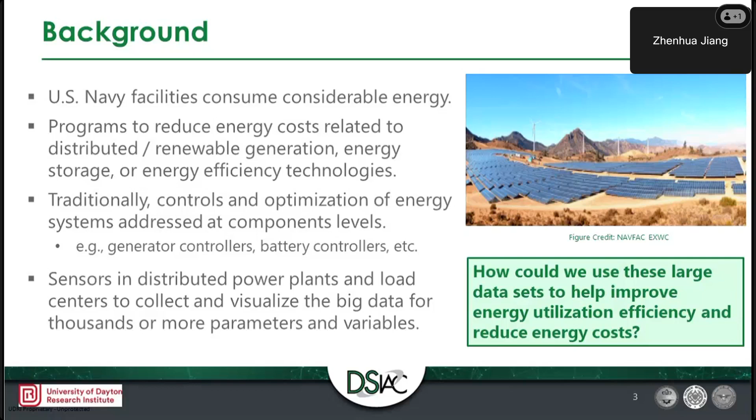In the past, some solutions such as microgrids could provide improved resiliencies, but the challenges are still existing, and some new capabilities are needed. For example, we may want to have some system-wide energy optimization across the large-scale power grid, or we also want to have some real-time look-forward prediction capabilities to understand the system behavior, such as the renewable energy availability, load profiles or priority, energy costs, or even electricity prices.

In the case of parallel operation, multiple generators can operate at full or partial capacities, which can result in some varying fuel efficiencies. Also, these generators may need to adapt to different control scenarios, for example, the voltage regulation or active power regulation. We can use some load shedding strategies, but it might be based on some dynamic priority level, which depends on the scenarios or operating conditions. So some additional data analytics or learning algorithm might be desirable.

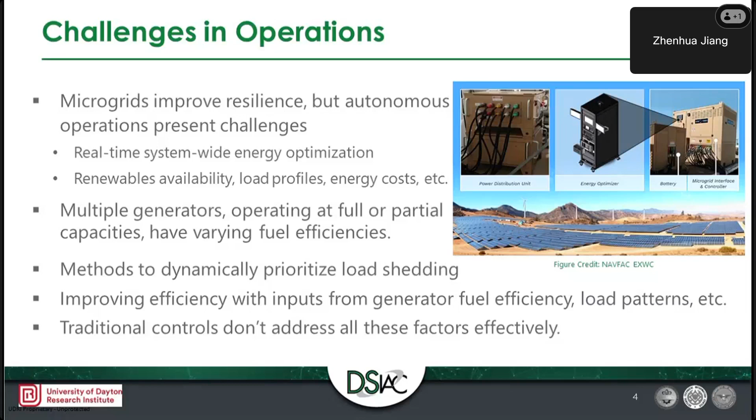So with all of this said, situational awareness about the system operations, such as generation and load, might be essential to achieve more efficient utilization of all grid assets. However, traditional control systems may not address all of these factors effectively, particularly in real-time operation. So to address all of these challenges, it's very important to understand options and the impact of potential energy-saving technologies, and even automate the energy-saving processes.

Specifically, to answer the data analytic questions raised earlier, the UDRI team proposed a machine learning and predictive analytics solution in a contract with the Navy. This solution combines the benefits of the data-driven Bayesian neural network with a physics-guided learning framework. And this solution can also enhance the predictive capabilities to optimize the control for microgrid operation. And the objectives are to improve the energy forecasting accuracy, reduce energy costs across the Navy shore establishment, and also reduce the redundant equipment if possible.

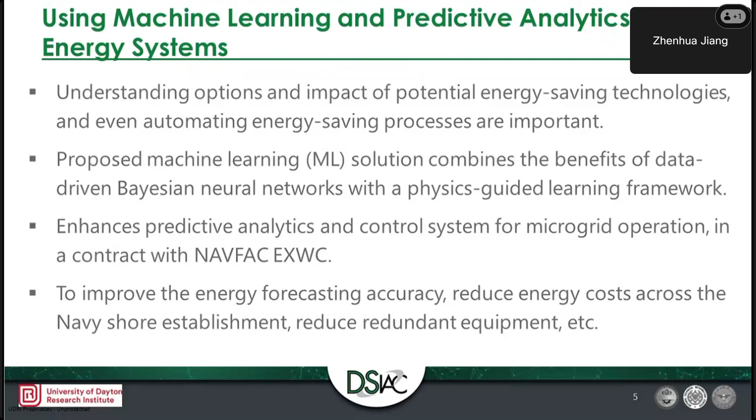So now let's take a look at some innovative features of the machine learning analytics solution we are developing. In the past, modeling and simulation of dynamic systems have been an important tool for control system analysis, design, and testing. Traditional physics-based models provide very high fidelity dynamics for the control design, but it's still facing challenges. There might be some unknown system dynamics at the time of design, and also the system or model parameters may change with the system operating conditions.

So on the other side, some data-driven machine learning methods may analyze the data and extract some useful insight. These analytics might be available because we can take advantage of the operating data available from sensors and some machine learning algorithms and computing resources. But on the other side, the machine learning approach typically generates some point-to-point predictions, but the uncertainty in the causal relationship may not be fully captured.

What is good is that some probabilistic-based Bayesian learning may be able to concisely capture uncertainty based on the probability. So the Bayesian inference typically assumes some prior knowledge based on the prior probability distribution and can derive the posterior distribution or some new knowledge from the collected datasets. This dataset can be considered as the new evidence or observations. And the Bayesian inference process can update the belief or the behavior of the prediction.

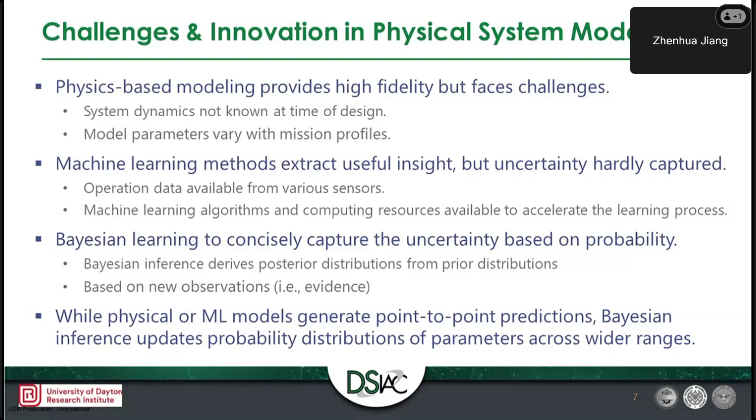So here, this shows a diagram of our approach, where many people talk about cyber-physical systems or digital twins. Our methodology is a three-pronged approach. Here we consider the physical, digital, and probabilistic aspect. So this is a three-dimension, or we call it a triplet framework for system dynamics modeling and learning.

In the physical domain, sensors can collect data from physical systems, and the actuator can perform commands sent from the embedded controllers. Physical-based equations can be used to characterize the temporal dependency and the dynamics in the physical systems. In the digital domain, machine learning methods can capture the causal relationship and reflect the input-output relationship in the training datasets. High-performance computing systems such as GPUs, FPGAs, or supercomputers can help to accelerate model learning processes.

Uniquely, the third dimension in our approach is a probabilistic representation and analytics, which can quantify uncertainty and capture the stochastic behaviors and consequences. This is important and useful for what-if scenario analysis in contingency studies. It will provide opportunity to maintain some deep deliberations about the possibility that has not been happening yet and predict the potential consequence before adverse effects occur.

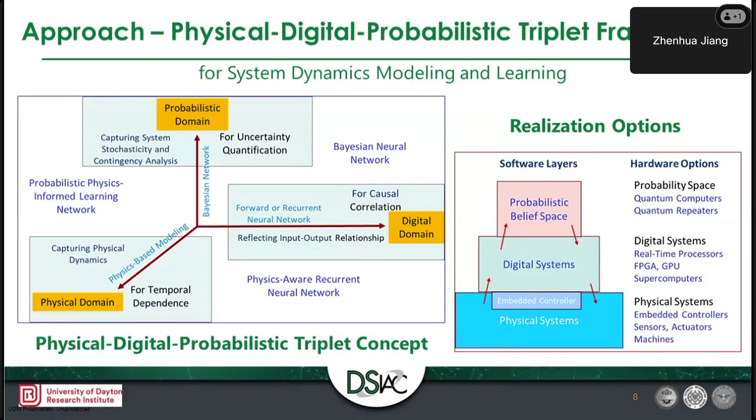So our machine learning analytics solution has three dimensions and leverages a modeling method suited to different domains, including the physical domain, digital domain, and the probabilistic domain. In this framework, the physical space models can represent the known knowledge we have that can be integrated into the design of a neural network.

The neural network learning capability can learn the patterns or features from the operational data and predict the potential behavior of the system. And the Bayesian inference can be used to capture the uncertainty and the probability distribution of the variables or factors in the model. And altogether, this can achieve more insight about the system operation.

So this diagram illustrates an example of the model integration or fusion process of data-driven physics-guided Bayesian neural learning. So before the design, we may need to determine the existing known equations about the system model and some parameters and constraints of the system. So this model integration process consists of 6 steps. First, we can formulate the physics-based equations and feed these to the design of the neural learnable model. And second, we can use the offline or online data sets to train the neural network models.

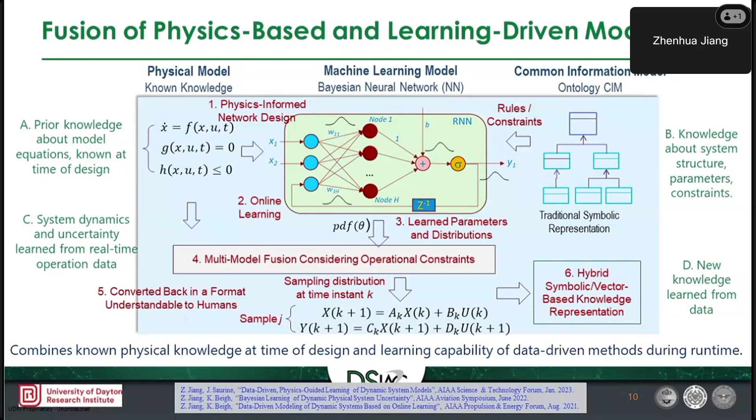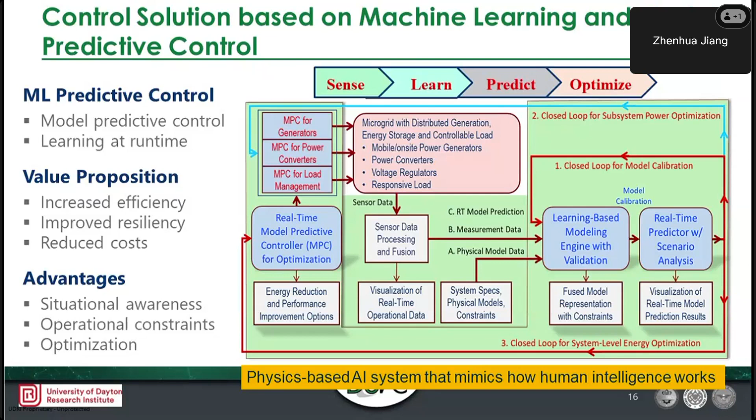We'll take the simple circuit as an example to show how we can design the two-layer MPC. First, we follow a general approach to formulate the model predictive control schemes. Typically, we need to know the models of the dynamic system. The models could be based on physical knowledge or equations, or even machine learning models. And we can consider some constraints on the control variables or even state variables.

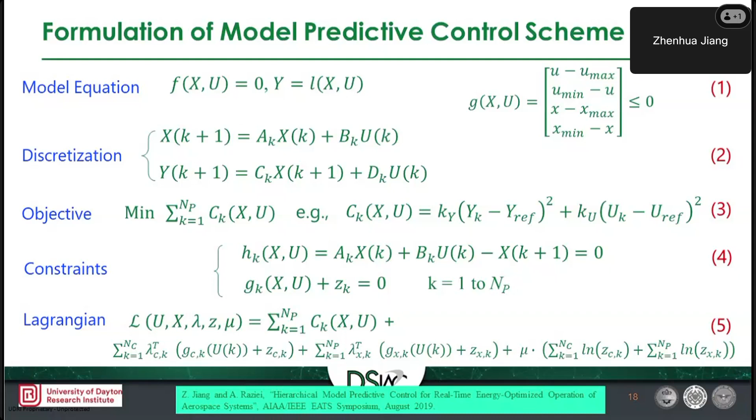The next step is to minimize the Lagrangian. In order to do that, we can define a decision variable vector theta here. The goal is to find the best decision vector theta so that the Lagrangian could be minimized. According to the first order optimality conditions, or KKT conditions, when the derivative of the Lagrangian with respect to the decision vector theta is 0, the Lagrangian will be minimized. So the goal then is to find the solution to this equation, and this is a nonlinear equation of theta.

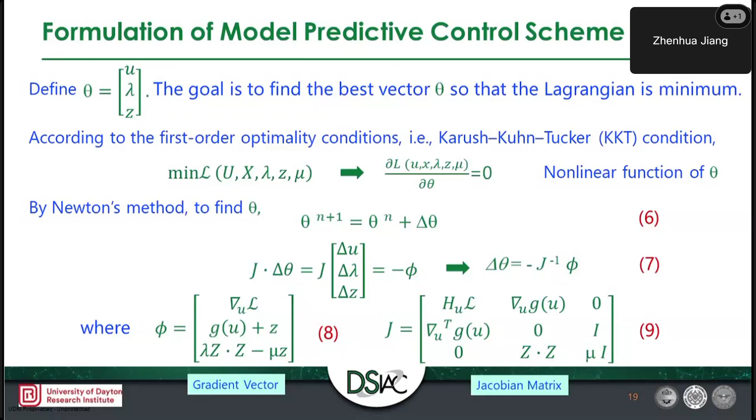By using Newton's approach, we can find the iterative solution of the decision vector theta according to the equations shown here. There are some calculations to find the Jacobian matrix or gradient vector to update the decision vectors. After some iterations, the decision vectors can be found. And this process will generate the optimal control loop for the control systems.

Next, I would like to take a very simple example to show how we can apply model predictive control to the hybrid systems. Here, there are two MPC controllers. The higher MPC is trying to optimize the energy flow across the entire system, and the lower MPC is trying to manage the dynamics of the power flow.

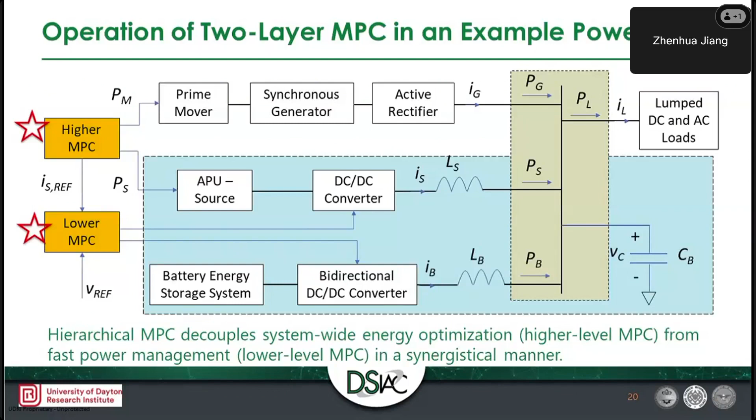First, in order to optimize the energy flow, we can consider the model equations. Here we can find the energy flow equations for different components, for example, the main power sources, the ancillary power sources, and energy storage systems. All of these equations could be discretized to describe the relationship between the input and output variables. The next step is to define the objective functions.

Here we can consider the generation cost, also some dynamic energy reserve for the energy storage systems, and the power components may also have some constraints. For example, the power generation capacity, the rate of change of power, and also the capacity of energy storage. There are different constraints we can consider, and then we can follow the general procedure to develop the control scheme for the higher level MPC.

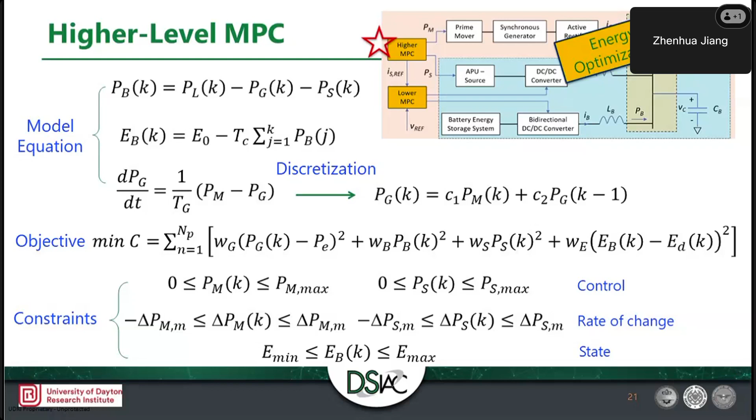Next, we can also consider the lower level MPC to manage the power flow. This lower level MPC is more focused on the dynamics, the management of the current flow and voltage regulation. We can write the dynamic equations for different components such as the inductor and capacitor. Then we can convert the differential equations into discrete time state space equations.

The next step is also to define the objective function. This can consider current regulation, voltage regulation, and we can also consider the constraints on the actuators like the power converters, the change of the control variables, and also the current from the energy storage systems. By following the same general procedure, we can then develop the control scheme for the lower level MPC.

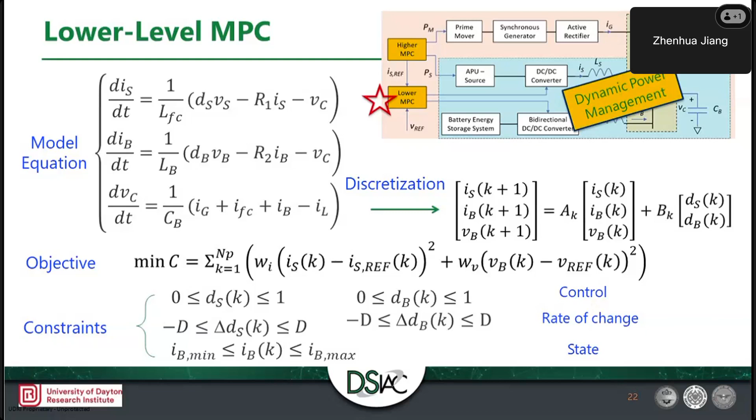To demonstrate the operation, we can take a very simple example here. This publication describes the simulation model in MATLAB, but we can consider implementing the MPC control code in a LabVIEW environment. We can take the lower level MPC as an example. The power system model consists of primary power sources, secondary power sources, and energy storage systems. And we have different types of loads.

We can have some change in the load, and the two MPC controllers can work together. The higher MPC can generate the set points for different components and send the set points to the lower level MPC. The lower level MPC is going to generate control commands for the power converters.

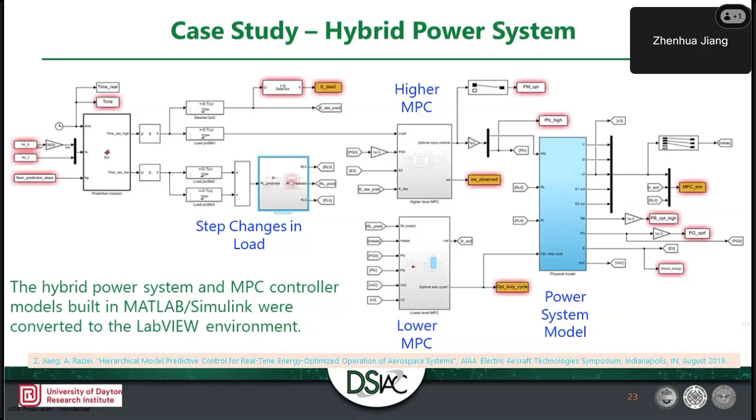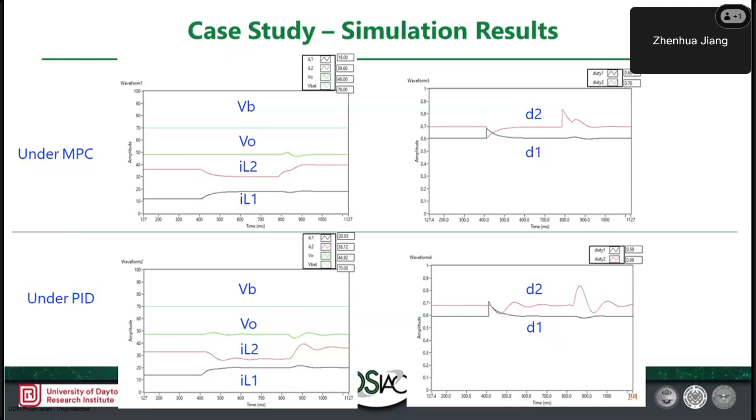But the MPC can help to regulate the power flow and voltage better than the PID controller. So this is just an example to show some of the advantages of the model predictive control strategies. Now let's take a look at some applications of the machine learning methods for power energy systems.

In the solution, we can generate some new modeling and optimization capabilities. So the machine learning model can predict time-varying dynamics or probabilistic behavior of the system. And real-time prediction capability can consider the physical dynamics or uncertainty in the systems, or even the causal relationships. And the optimization methodology can consider the optimization in the control loop. So all of these capabilities will help us to produce some new functionality in the power system.

So for example, we can learn and validate a compact representation of the complex components from offline operation data. And once we train the model, we can also use the model to make predictions and update and calibrate the model from the online operation data. And uncertainty can also be incorporated in the model to consider some contingency in the prediction. And the variations in the power production or even load consumption can help to determine the set points for different energy assets.

And also the machine learning capability can be used to accelerate the hardware-in-the-loop testing of the power systems with some compact learning-based models. Because some models might be very hard to compute, or even some dynamics may not be known. But if we learn the dynamics from the operating data, the model could be used in hardware-in-the-loop testing to accelerate the power system design.

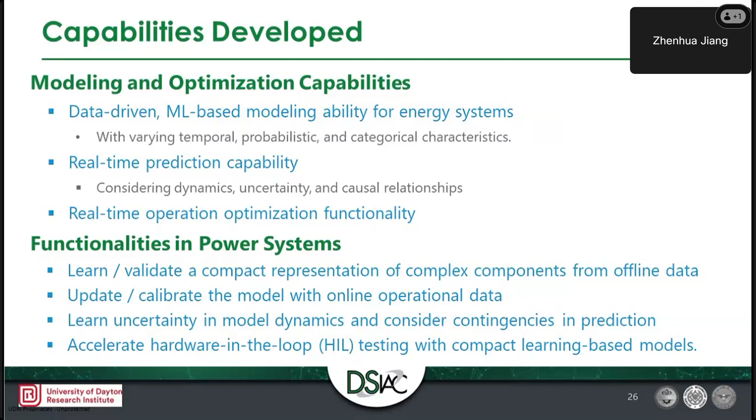We can apply the machine learning methods in different ways. So for utility planning, we can use predictive analytics to, for example, forecast the renewable energy production, load profiles, or even load priority levels, energy efficiency for different components such as motors or some other loads.

And also, we can use the machine learning-based approach in facility management, for example, the energy optimization for building energy systems or even hybrid vehicles like hybrid trucks. And also a digital twin could be developed to facilitate the test facility to consider the dynamics from the machine learning models. And also we can leverage the machine learning model prediction capabilities in predictive maintenance schemes. There are some other applications.

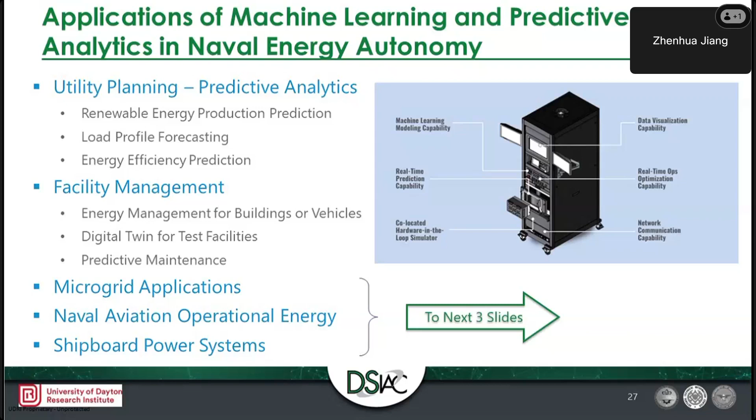For example, in the microgrid domain, you can consider the machine learning capabilities to model the dynamics from renewable generation, variable loads, or even the different utility prices. And also we can use operation optimization with different objectives. For example, if you optimize the energy costs or some power generation cost or delivery loss, and also we can use this to size the energy storage for stability consideration. And hardware-in-the-loop testing can also benefit to study the resilience of the system under different conditions.

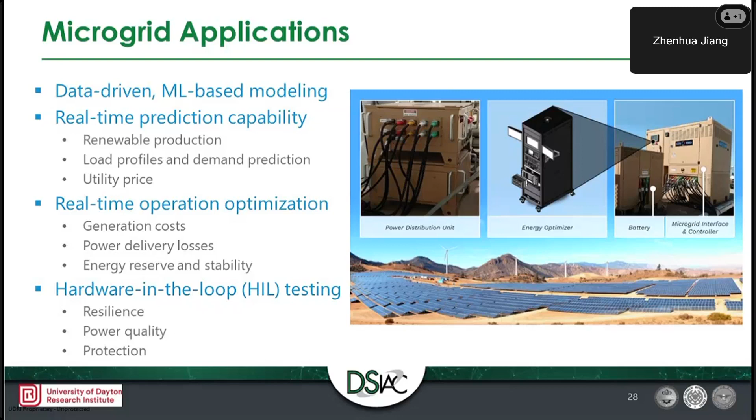Aviation operation energy can also benefit from this type of machine learning and predictive control because there are some safety considerations, weight and size considerations, and also agility or mobility might be a concern, because the control systems may achieve some autonomy from the predictive capability. And the desired advantages may also include predictive optimization in real time, some proactive actions before the operation changes. And also the model predictive control can consider the operational constraints or even safety constraints.

Some of the operation costs could be reduced by maintaining the optimal dynamic energy reserve. So basically, the energy storage system may be sized to the necessary level that can meet the mission requirements.

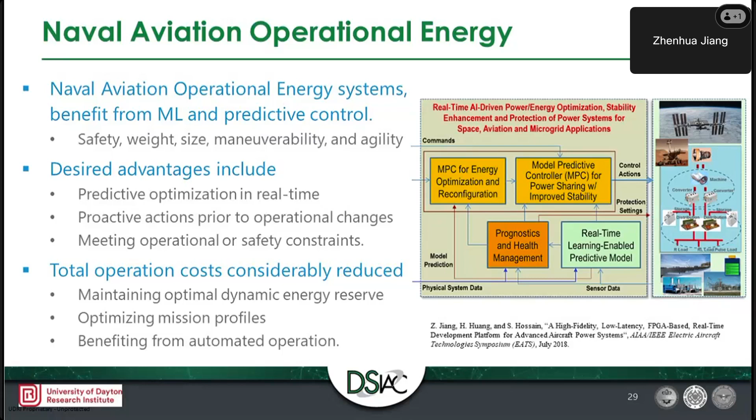Also, this type of energy system can benefit the automated operation because of the autonomous learning and prediction capabilities. The proposed technology can also be widely applied to shipboard power systems, particularly electrified ships, because there are diverse energy flows and flexible controls and different types of equipment.

For example, there are complex components on board ships, such as the prime movers, generators, and sophisticated loads such as directed energy or high power radar. Those devices may have some operating constraints, and they need to be considered in the power supply design. And also there's a need to optimize or minimize the power system size and weight.

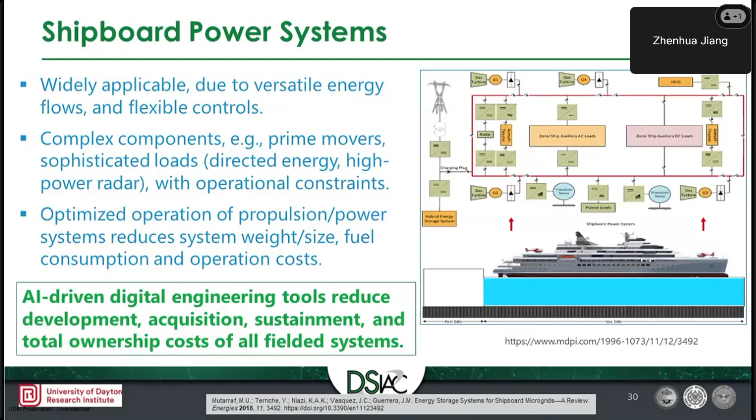Also, optimized operation of propulsion power systems can reduce the system weight and size, fuel consumption, and also the total operational cost. So as a whole, all these AI-driven digital engineering tools can help reduce the development time and cost, acquisition, sustainment, and total ownership cost of all fielded systems.

So let's go through some anticipated benefits. The primary benefit that we can expect is to improve the military capabilities due to the enhanced power and energy performance enabled by AI and machine learning technologies. This could be achieved by capturing energy system dynamics, degradation, and uncertainty into the model and the control design, providing the mechanism for online learning capabilities to update the model to understand the varying conditions,

enabling fast or even faster than real-time hardware-in-the-loop simulation to gain insight into system behaviors, and finally, empowering the integrated control platform that can proactively manage energy flow among the subsystems. In order to make the benefit real, some validation is needed in realistic applications. This validation effort may include energy savings, cost savings, and power quality and resilience improvements.

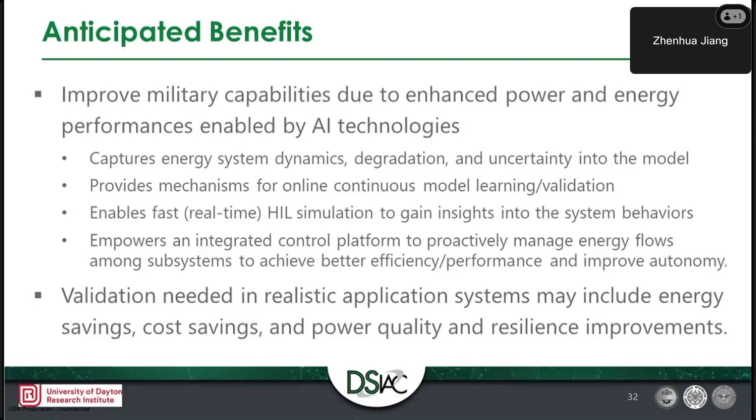There might be different ways to achieve the goal. A main recommendation for future development will include demonstrating some prototype of the energy controllers and validating their advantages, including validating the effectiveness and accuracy of machine learning models for forecasting, conducting power hardware-in-the-loop testing of a prototype in realistic microgrids, and performing the field demonstration at a DoD installation site for rapid transition.

For further development, the machine learning method can be used in the test and evaluation stage. For example, we can use machine learning to screen and down-select test scenarios in maintenance or other test facilities. We can also automatically analyze test data to determine the correlation in system parameters and generate candidates for best design options. And we can also have diagnosis, prognosis, or preventive maintenance in energy systems.

So to summarize, we have discussed some emerging applications of AI and machine learning technologies in energy autonomy and digital transformation. This can achieve potential impact on operational autonomy and benefits across DoD's power and energy ecosystems. An important note is that we can also amplify the impact of AI and machine learning by combining them with other emerging digital technologies, such as sensor fusion, predictive analytics by deep learning or data science methods, optimization techniques, or even emerging quantum computing.

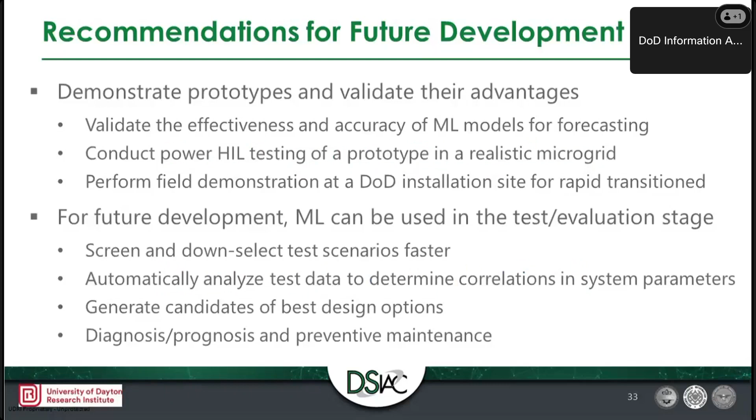The LSTM network typically consists of multiple cells, and each cell can capture the dynamics in one time instance, and the LSTM network can consider the time sequence. In this particular example, we consider 1 minute, like 60 samples or 60 points. Because the sensor data we have has a resolution of 1 second, we have data for each second, so the 60 samples will be 1 minute. So the neural network model will consider the time sequence for 1 minute. And the input required will be the solar irradiance prediction.

And that establishes the correlation between the input and output, because solar irradiance may have a very major impact on the output of the power production. And if you have more or higher resolution data, they can improve the prediction.

The challenge will be different, because long-term forecasting might be different than short-term forecasting. There are different challenges. For long-term forecasting, there are too many variables or factors that can affect the production, so it might be a little harder to predict. But for short-term, we may also consider